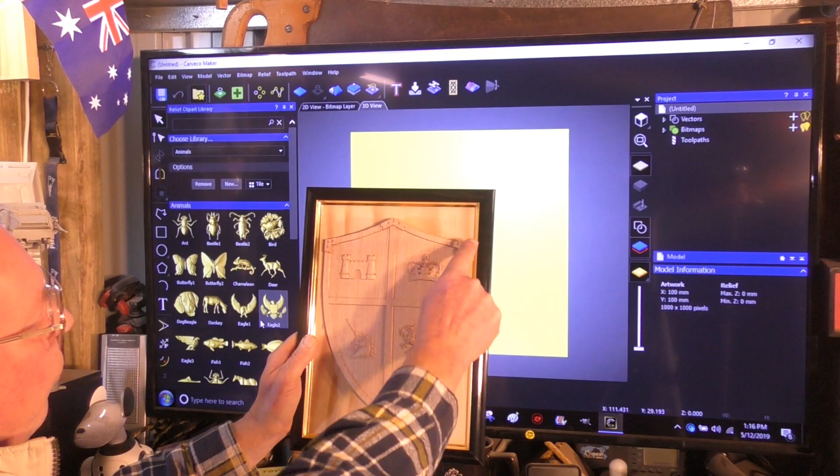What I aim to do today is give you a general overview of Carveco Maker, but we're also going to use some of the drawing tools and some of the toolpath strategies just to get you started. So here's the clip art library, of which there's over 600, and you're not limited to a single relief in your project. This is made up of 5 different reliefs - this is one relief, and I've added on top another 4. So you can make multiple reliefs with this program.

So we'll just get out of this for a moment. We will come back to this in future tutorials, and I'll show you how to make something like that.

So down on this side here we have vector drawing tools. Now a vector is quite simply a line of any description, shape or size. It's a line, so don't get worried when you see the word vectors.

So what we're going to do is just click on the circle drawing tool, and we're going to come here. Incidentally, we're drawing in the 3D view. If you don't want to draw in 3D, you won't see it as 3D because we're doing a 2D drawing. But you can actually switch between the 3D and 2D by these tabs up here at any time.

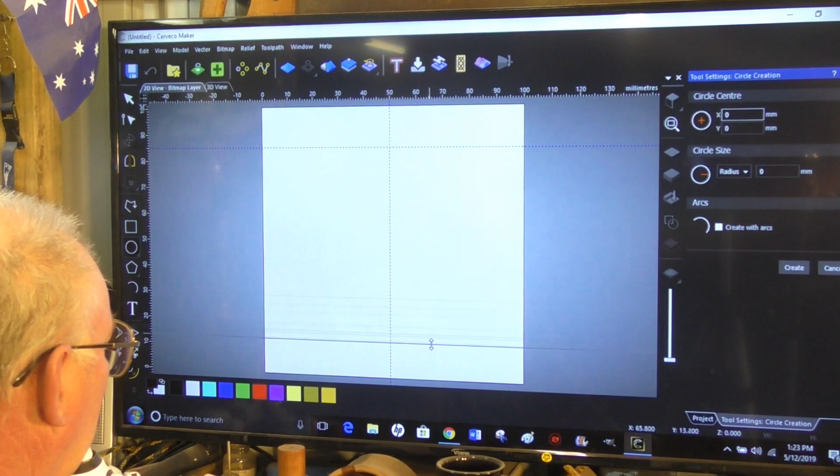And if you wanted another one, there's no limit to however many lines you wish. 10, 15 there. So you can pull out reference lines to assist you with drawing. If you want accurate drillings or pockets, this is where you do it.

So what we're going to do is, we've got our circle selected, and we'll come up here, and snap is turned on. If you notice the cursor, as you bring it, it'll snap to lines, it'll snap to the center. I've got automatic snap turned on.

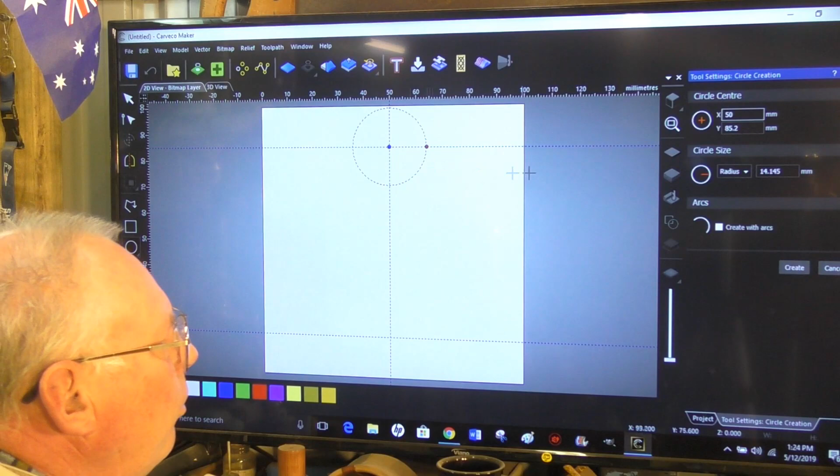So we're going to put one here and just pull it out like that. I'm actually holding down the left mouse, so I can pull this out to wherever I want it, really, and then release it. And then you can go over here into this dialog box or wizard.

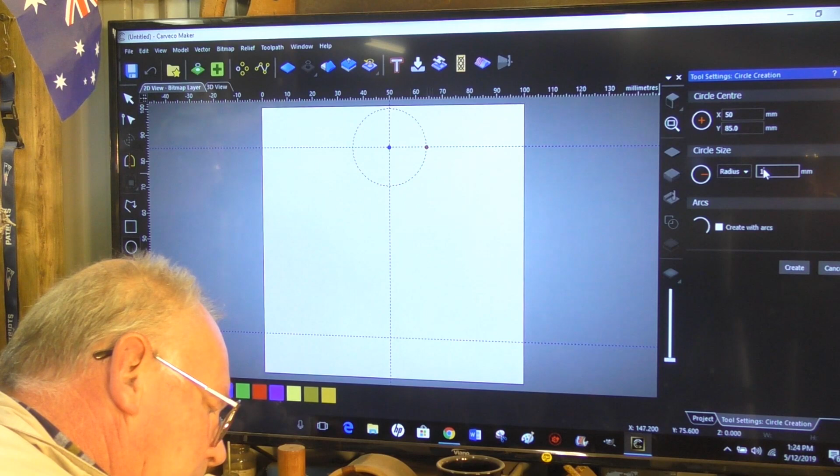And you can select the exact dimensions of what you want and even where you want it. You can see here we're a little tiny bit out. That should be 0, so we're going to put a 0 there. It wasn't quite in the exact position that we wanted. And this needs to be 15 millimeters.

Incidentally, you can work with radius or diameter. So if you prefer to work with diameter, just press on the diameter and it'll automatically change. So we want 30 millimeters diameter. And that's all we need to do.

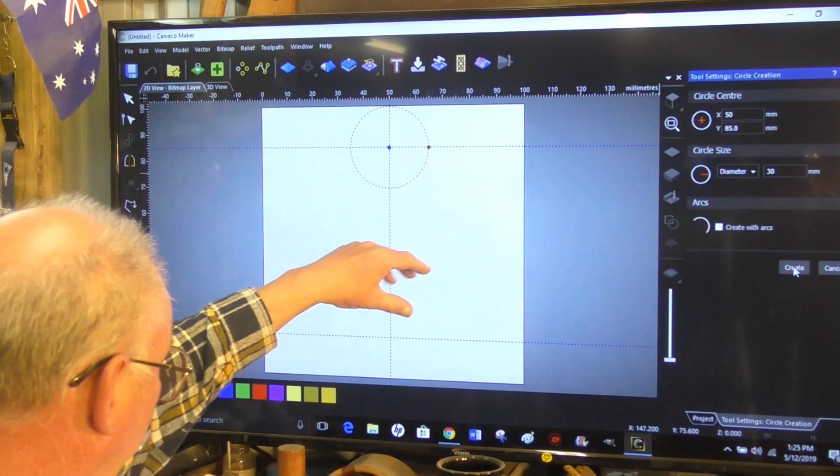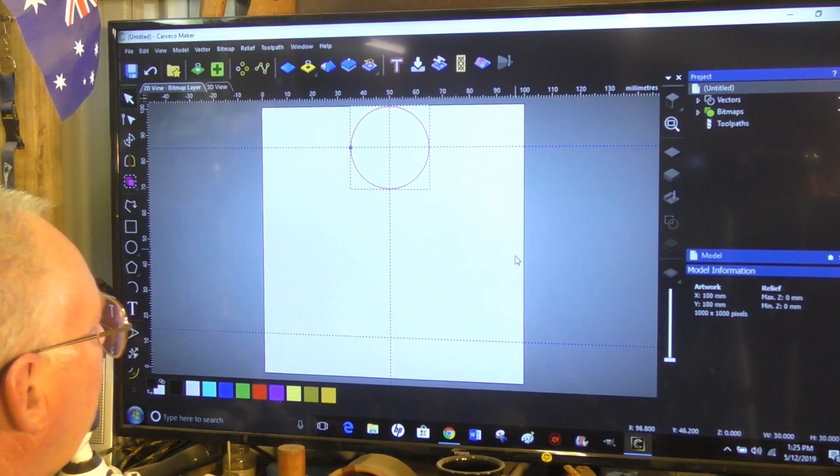So if you are happy with the size of that pocket and the dimensions of it, you can press create. And then you can come out of that, although it's still selected. So you can deselect it just by clicking anywhere on the screen.

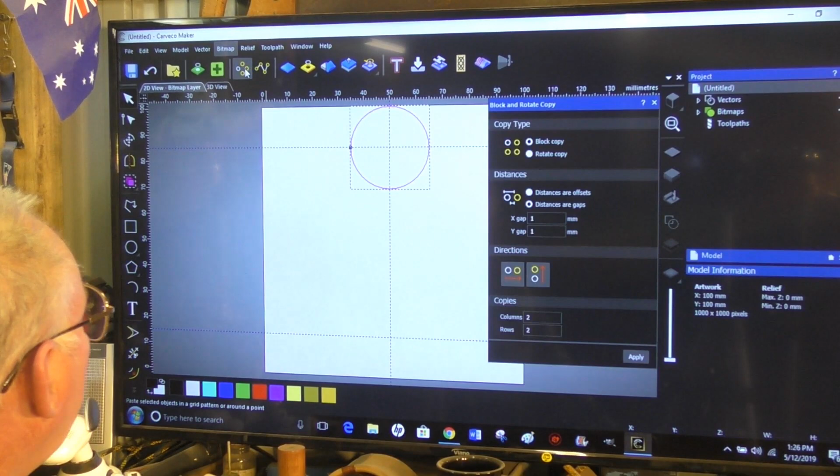So we want to make a copy of that down this far side. So easily, you just copy and move the cursor up to here. You have two options: block, copy, rotate, or paste along a curve or a line. I'm going to choose block, copy, rotate. And there's another little dialog box that comes up here that you can select how many you want to make.

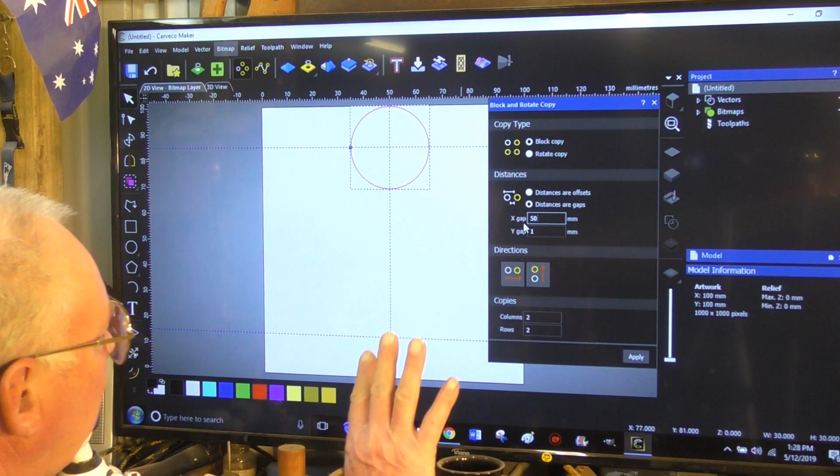We actually only want to make one, but it doesn't matter, we can make 4 and delete the other 2. We can select how far apart we want them. I'm going to say 50 in the X, and 70 in the Y, because I know this intersection is 70 millimeters away. I want 2 rows, 2 columns, apply.

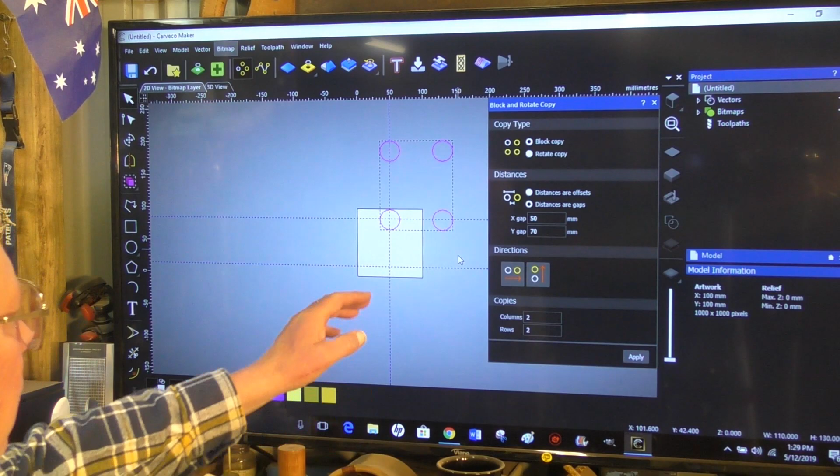You can see it's done it the wrong direction, so I'm going to undo that. If you notice, there are arrows, a red arrow showing which direction you want them copied. If you left click on that, we want it to copy down this direction, then apply.

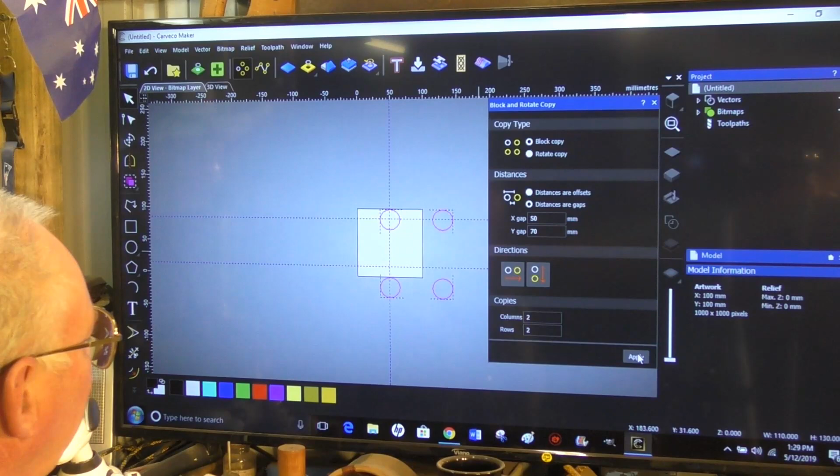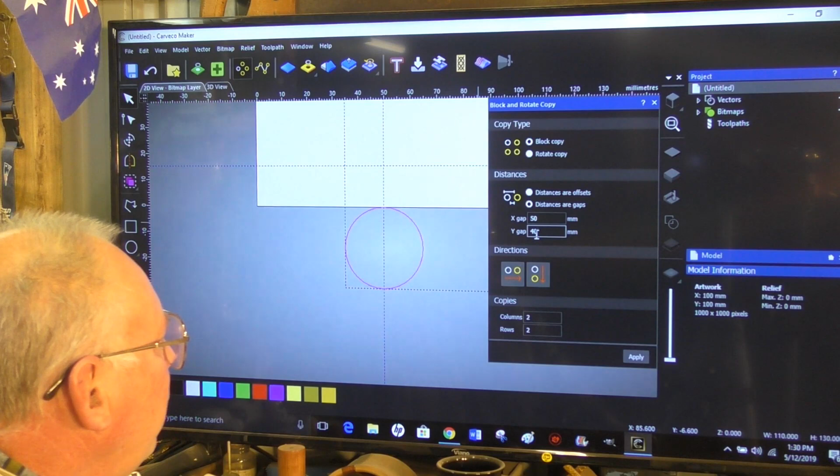You can see I've gone too far. So how far have I gone too far? Center of that one, I've gone 30 millimeters too far, so I need to change that to 40, and I need to reverse that. Apply, get rid of that.

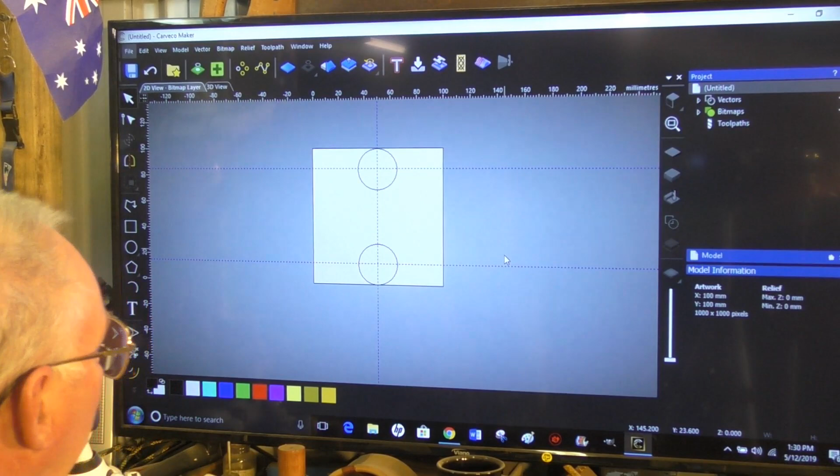Incidentally, I'm zooming in and out here just with the scroll wheel on my mouse. You can see I've got that one in the right spot. Deselect, I just want to select that one, press Shift and select that one, and press Delete on your keyboard, and it goes away. But I have one copied exactly where I want it there.

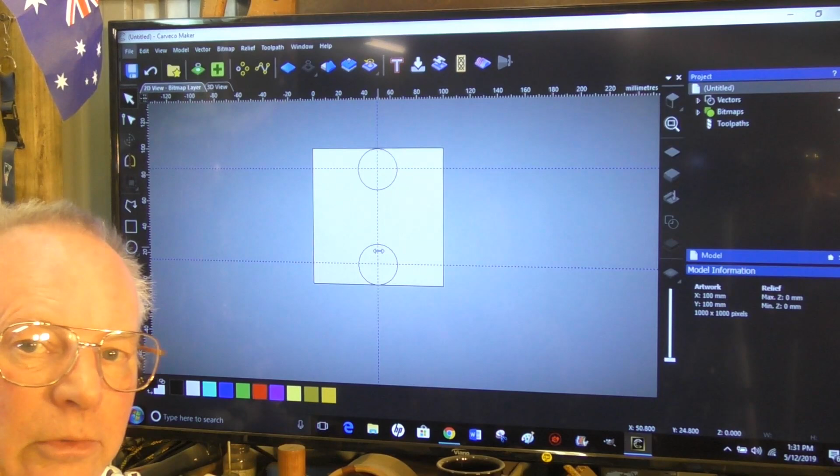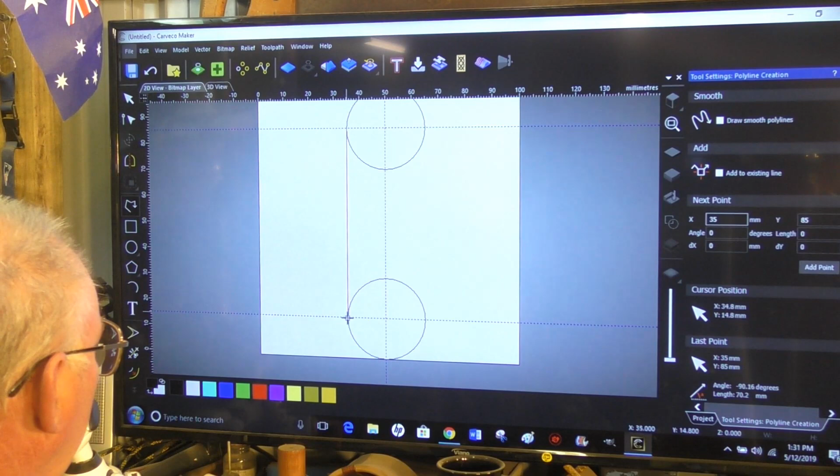So now we're going to draw a line from one side to the other, because I want to make this into a long elongated pocket. We come to the polyline tool, select that, and it will snap to there and snap to here. To stop the polyline from continuing, you just right click. And again.

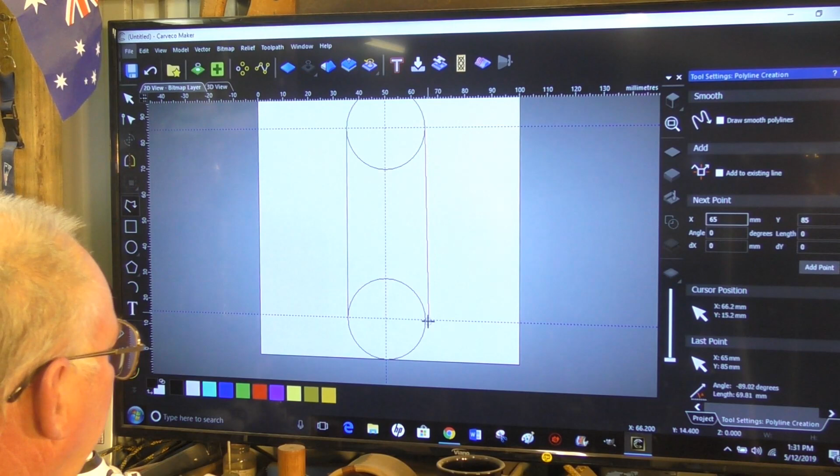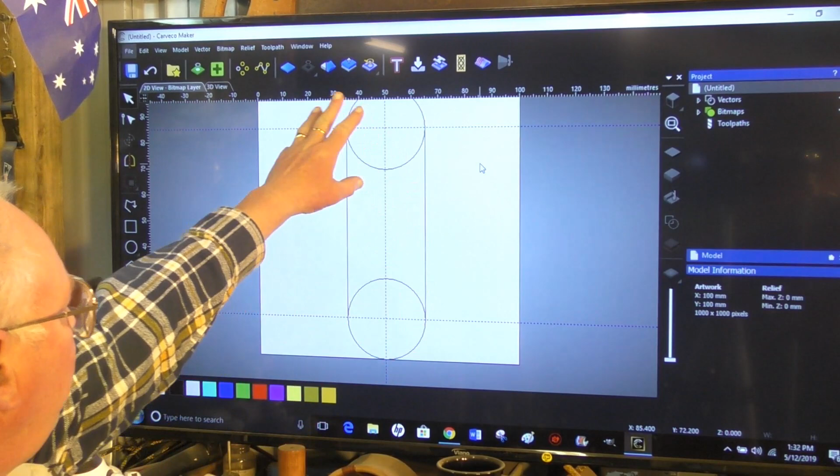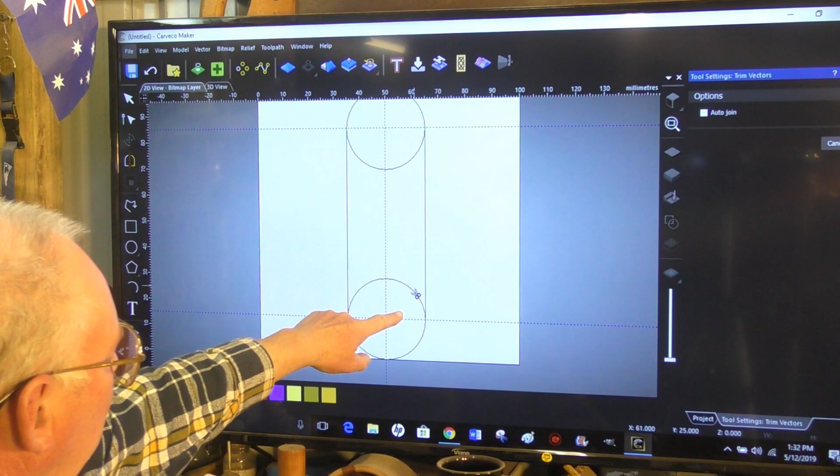And there's our polylines. So now we need to remove these 2 inner parts of the circle. We go to our vector clipping tool, because all these black lines are vectors, it's just a pair of scissors down here. We select that, and if you notice, they open when they go over a line, close, open. When they're open, Carveco recognizes this vector line it needs to do something with. So you hover over it when they're open like that, and left click, and it goes away. Same with this one, left click, goes away.

And now we have our shape. So we come up here to the selection tool, select it. See, they're not welded, it doesn't recognize it as one single vector. So we're going to join all those vectors up. If you go over it, just draw a box over it, I'm doing that by holding my left mouse key down. Okay, so now it's all selected.

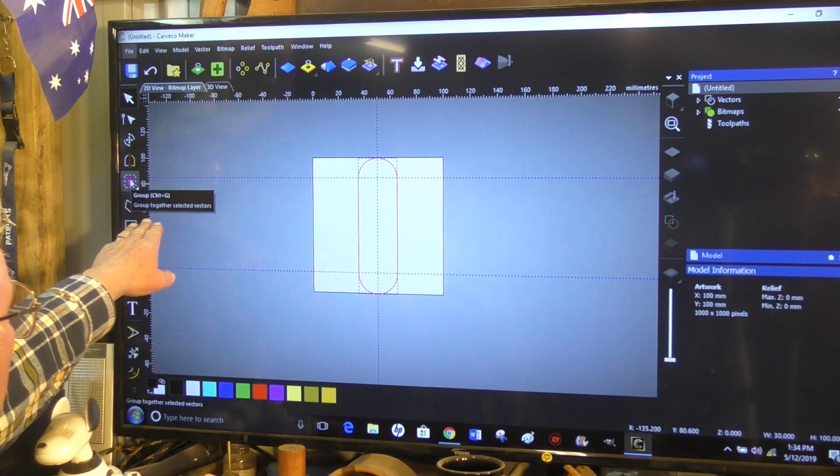So we come up here to this double square little icon. If you hover over the icons, it tells you exactly what it is. We're going to group these vectors together and make them one vector instead of 4. We just press on that, and now if you go to any one of the 4 individual vectors, you'll see it selects the whole thing.

You may hear me slip up and say ArtCAM. That's because I've been working with ArtCAM for about 13 or 14 years, and sometimes when I'm talking about these programs my mind is still in the ArtCAM mind frame. So, Carveco.

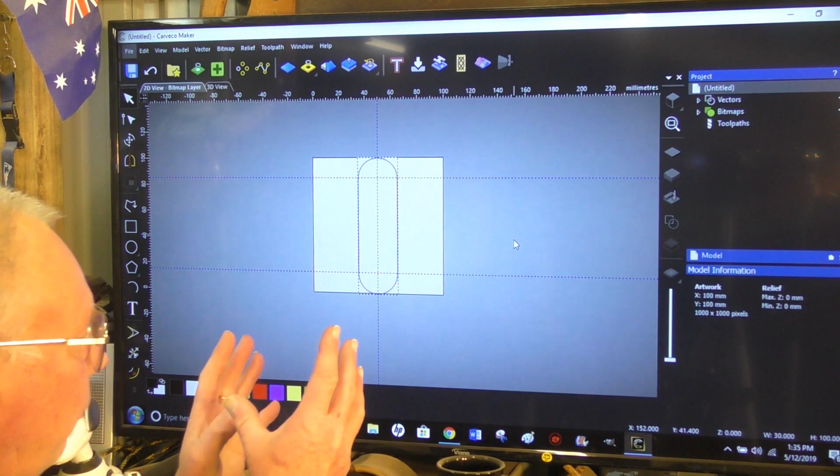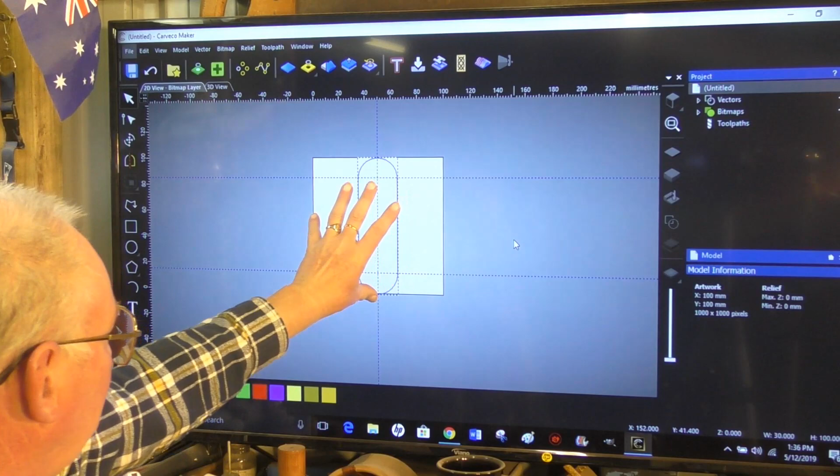Okay, so we now have our part positioned in the material exactly where we want it. We could position this anywhere in the material, this is just a tutorial piece, not going to be used for anything in particular, but that doesn't really matter. So we know our 0,0, or our datum for the start of our work, is on this bottom corner here, and this is positioned in the middle of the work where we want it. So the only other thing we need to do is machine it, and when we set up the tool to machine this, that's what gives us the depth in it, because at the moment it's as flat as a pancake.

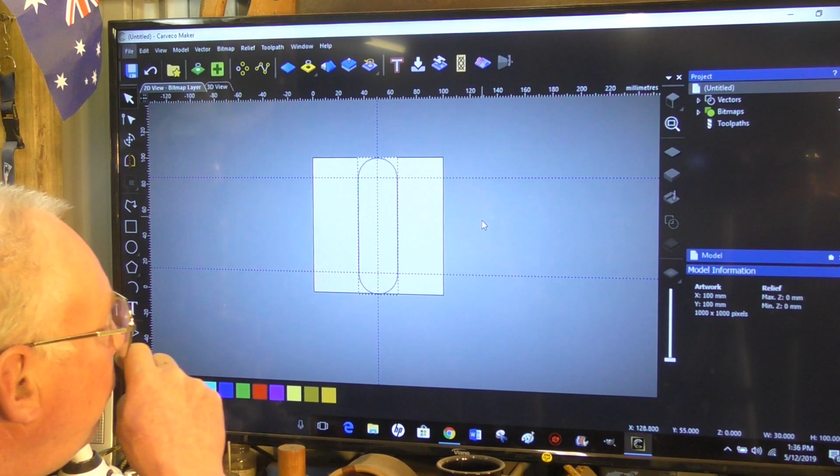So now we're going to choose a tool and machine this with Carveco. To do that, we choose a toolpath. So if you go over here and press on the toolpaths, they come up down here, they're also up here.

We need to... you can go over these, and if you hover over a little icon, the label will come up and tell you exactly what it is. Also, you can go into the help window up here, and in there you can find out what all these tools will do.

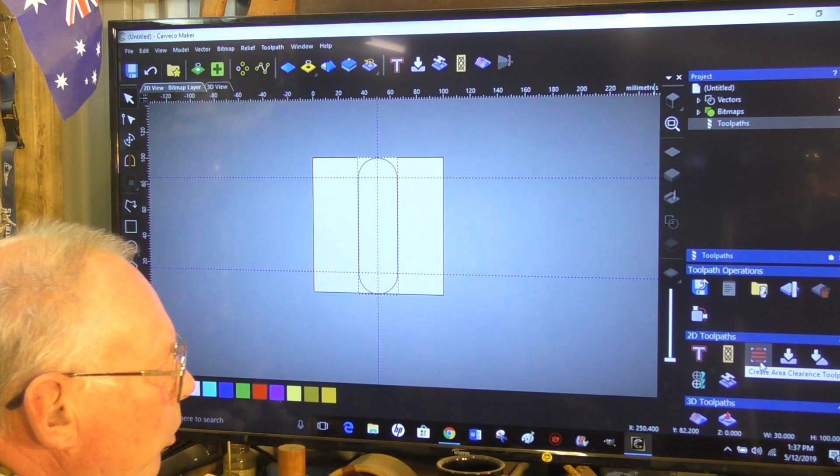We want an area clearance, which is that one there, so we'll pick that one. And this is the wizard, or the dialog box, for the area clearance.

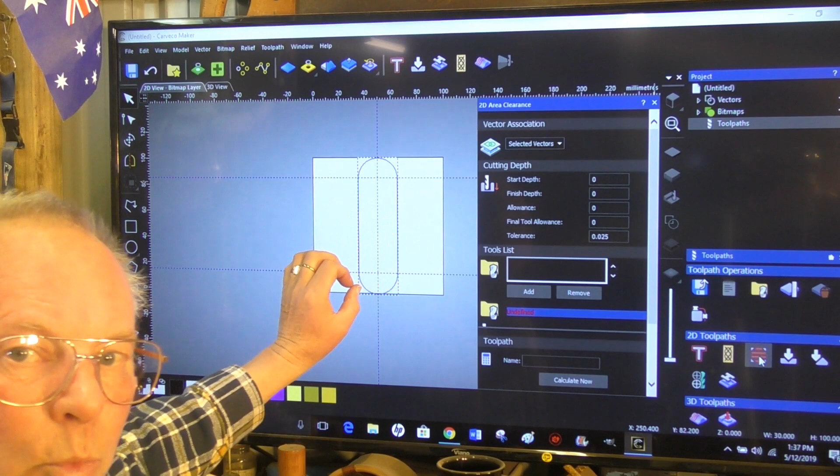So we have our vector selected, it's highlighted and selected. You must always have the vector that you want to work on selected, otherwise Carveco won't understand what you want it to machine. It is the selected vector that we want to machine. You can click on that, and it gives you other alternatives, but no, we want to machine that piece.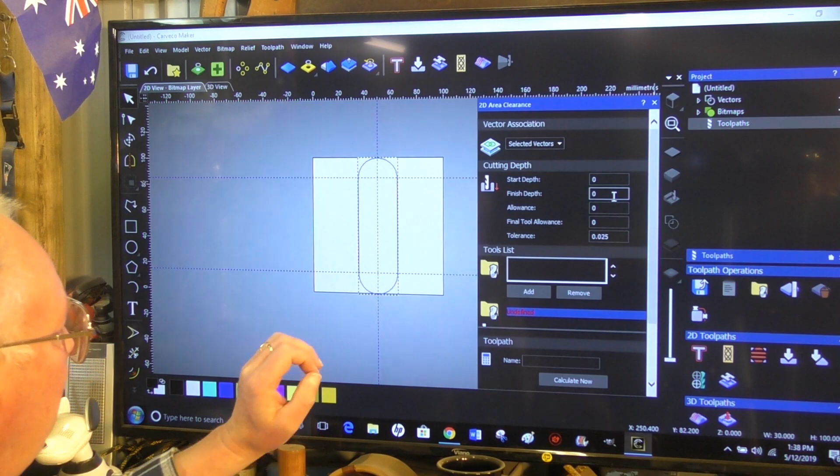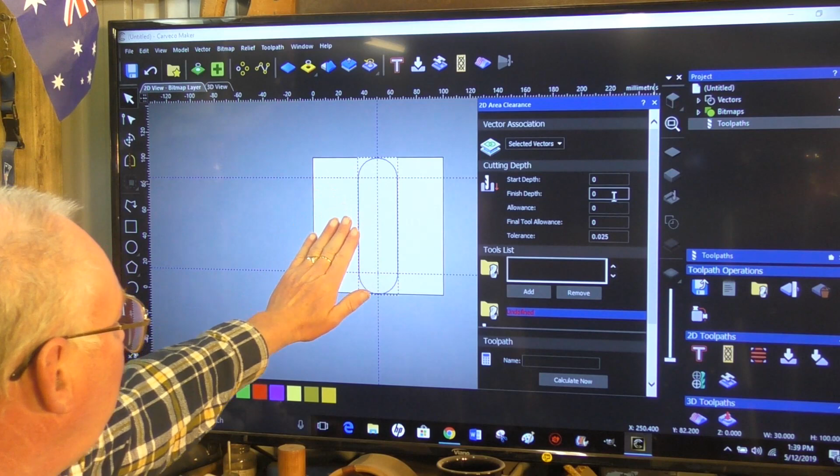Start depth 0. Now I always make the 0 part, the 0 of the material, the actual top surface of the material. I find it much easier that way. A lot of professionals I know use the actual bed, the top of the bed, as their 0. I do know that you can have some problems by ending up machining down into your bed if you're not careful. So I always prefer to use the top of the material.

So we're going to say the start depth is 0. Finish depth, we're going to say 10 millimeters, which is about 3/8 of an inch.

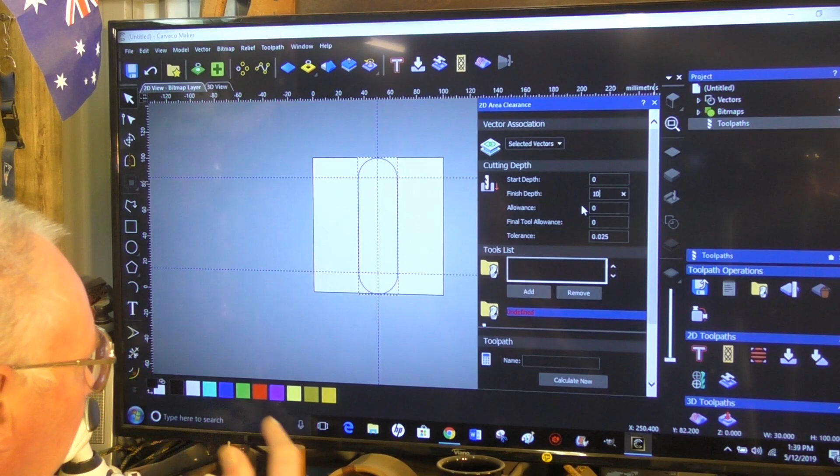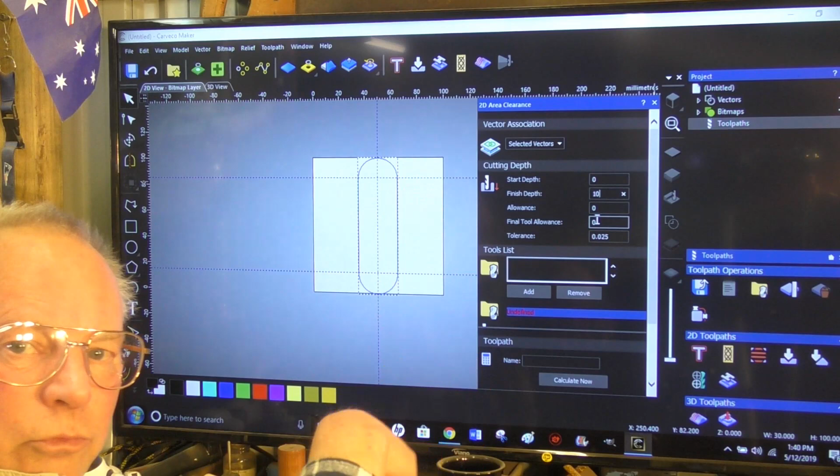For this, we don't really need to worry about tolerances or allowances, because we're just machining a piece of wood. With wood, it doesn't really matter, to the nearest thousandth of an inch is fine. If this was aluminium and it was a precision part, which CARVECO will more than set the tool paths for, then you would machine it out roughly first, then go back in for a finishing pass of a couple of thousandths of an inch to get it really, really accurate.

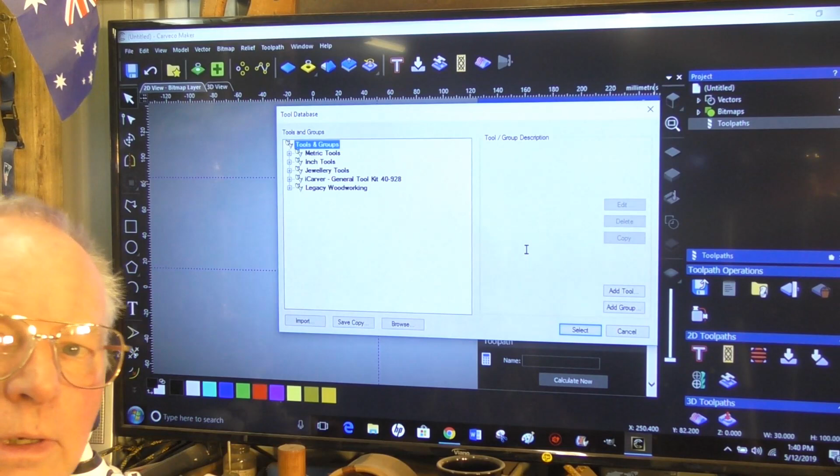Okay, so now we're going to go into the tooling list. We want to go in and press add. This fetches up the tooling list that already is written into CARVECO.

And metric tools, so we press on that. Let me have a look here. Wood or plastic, that's what we want. Roughing and 2D finishing, that's exactly what we want. See, roughing and 2D finishing.

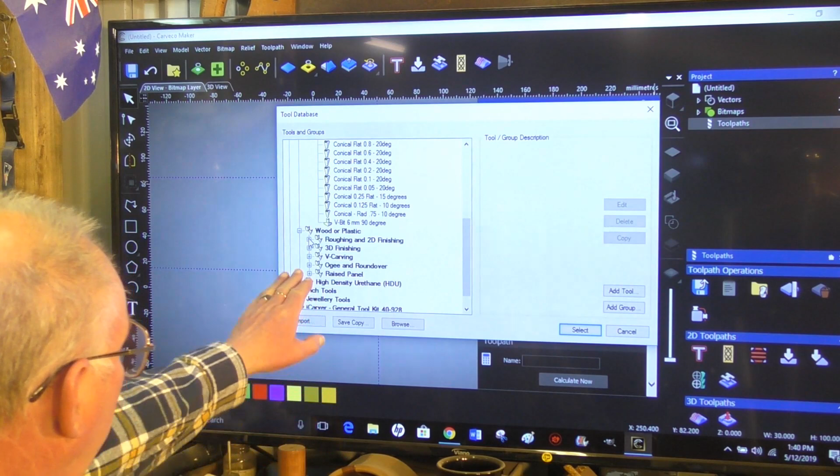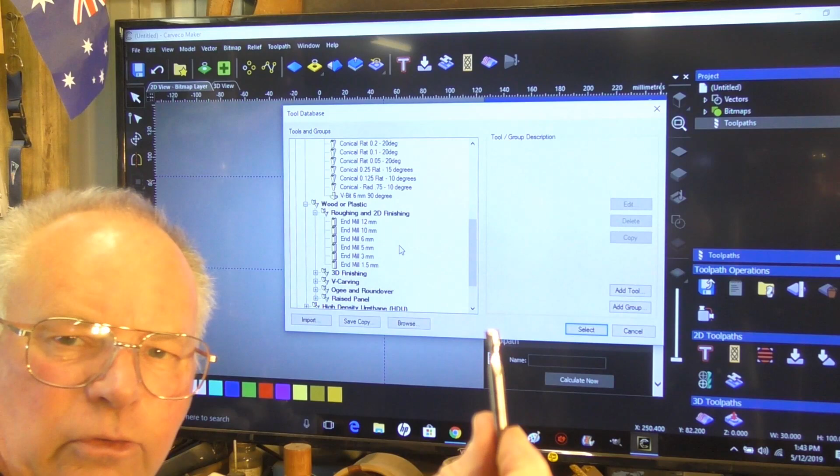And we're going to be using... I better find out what tool we're going to be using first. The tool we're going to be using is one of these, which is a 2-flute 6mm, just slightly smaller than 1/4 of an inch, end mill.

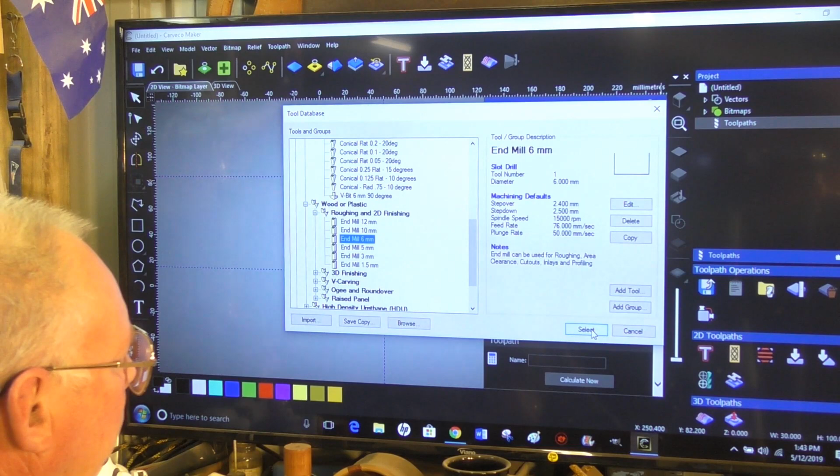So we're going to do the speeds and feeds now for a 6mm end mill, and here's a 6mm end mill here. So we're going to select that one, and now log it in. So there it is. But of course, it could be many different types of material.

So now we have to set the speed and feeds for this particular material, which is pine actually. Step over 2.4 millimeters, fine. Step down 2.5 millimeters, that's fine as well. Feed rate 76 millimeters per second.

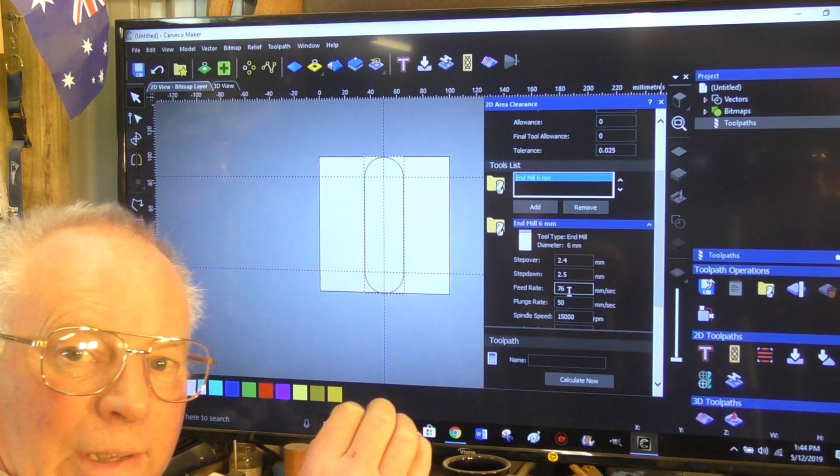Okay, so what's that, 3 inches per second. But I'll show you that you don't have to actually run it at that speed. In Mach3 you can elect to start up at a percentage lower than that, anything from 1% to 100%. I'll show you that next.

Plunge rate 50 millimeters, that's probably a little fast, so I'm going to alter that to roughly about 50% of the feed rate. That's what I normally do. So we're going to say 35, which is fine.

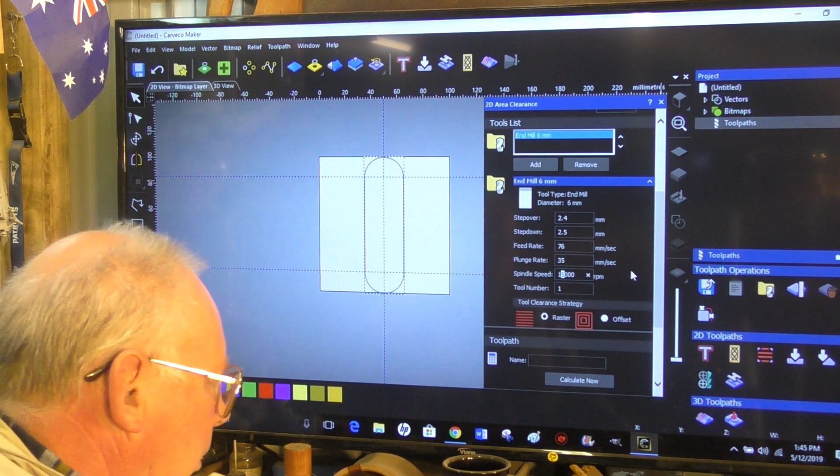15,000 RPM. Probably needs to be a little faster than that. So I'm going to run this at 18,000 RPM. There again, you can alter this on the controlling program.

Tool number 1. Look, I don't have a tool changer. If you had a tool changer on a Tormach or something like that, or a Mazak, then you would put the tool number in here. But it really doesn't matter for me.

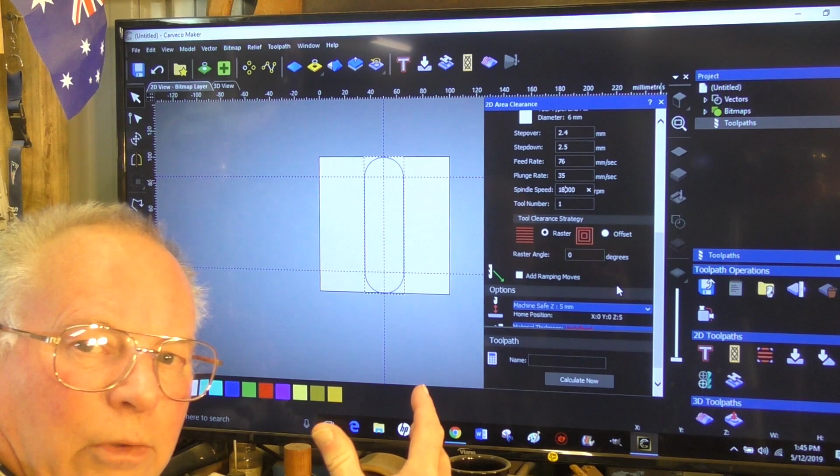Now, then it comes down to the strategy, how you want to machine this. You can either machine it in a raster, going back and forth like this — not really for this type of job. You do an offset, and I normally choose climb milling, and I normally start on the inside.

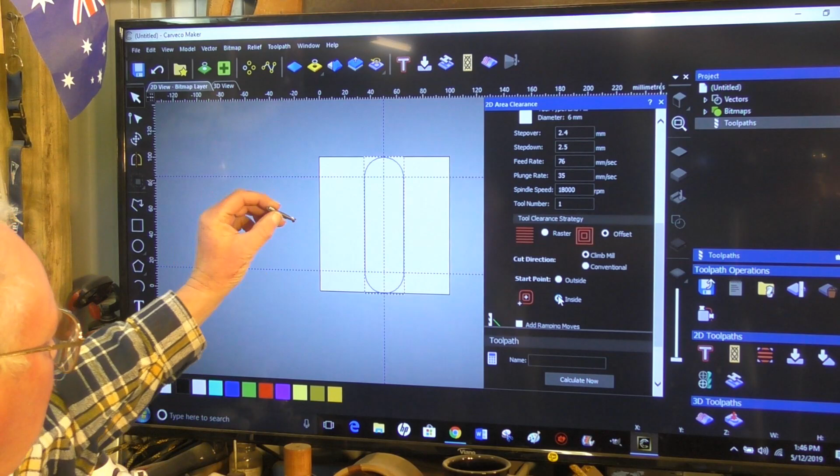So in other words, it's going to come to the inside of the material, and start machining from the inside out. That's exactly what we would want. Otherwise you can get some tearing, and well, you'll find out through experience, I think, but that would be my recommendation.

Now then, add ramp moves. With this sort of timber, you know, with pine or MDF or material like that, you'd probably be all right for the router head to come over and go straight into it and start machining straight away.

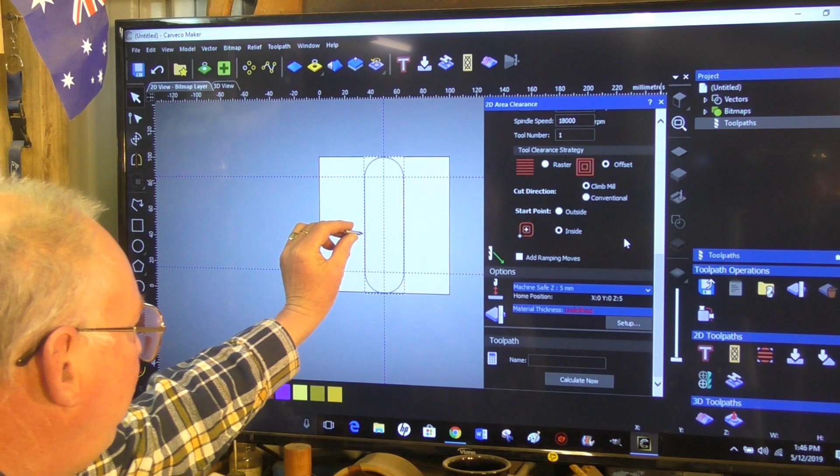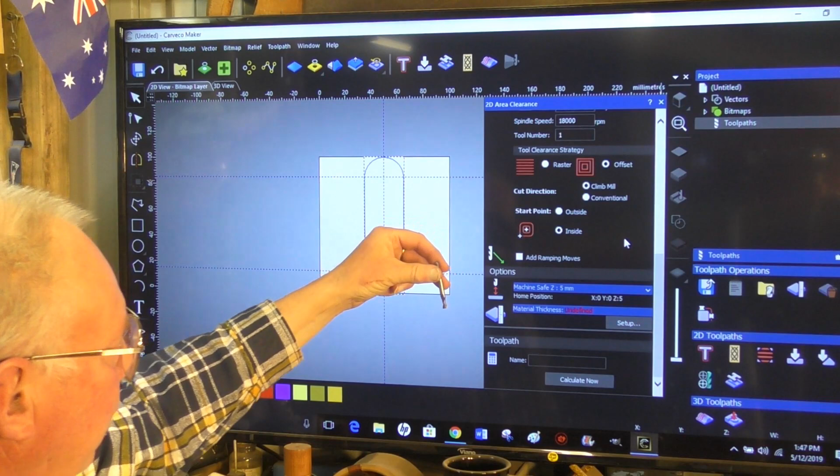But I find it a very good practice to have a ramp in or lead in move. In other words, the router head is going to come along to the start position of the job, and then start to ramp in and come in gently. It gives you a chance to hit the panic button or stop the program if you see something going wrong. You don't destroy the whole job.

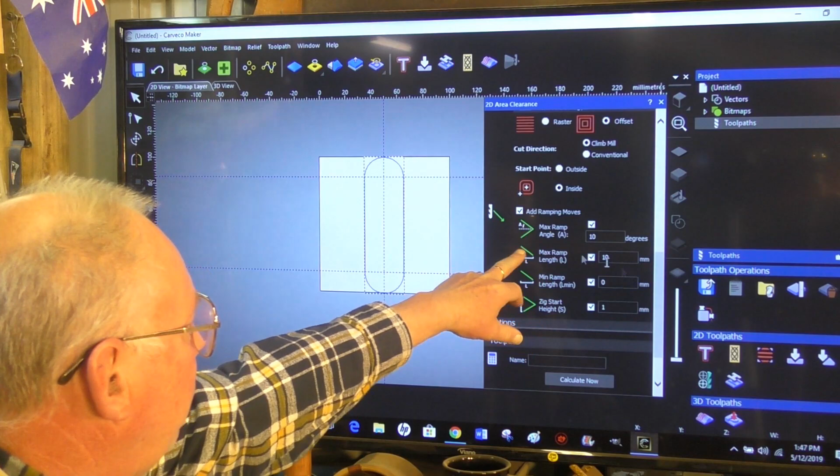So we're going to say yes, we want ramp in moves. This is an expanded dialog box, or wizard, that asks you, okay, is 10 degrees okay? In other words, a 10-degree angle coming in, it's fine. Ramp length, 10 millimeters, yeah, that's fine. These two really don't matter. The general information, the angle and the ramp length, that's all you really need to put in there.

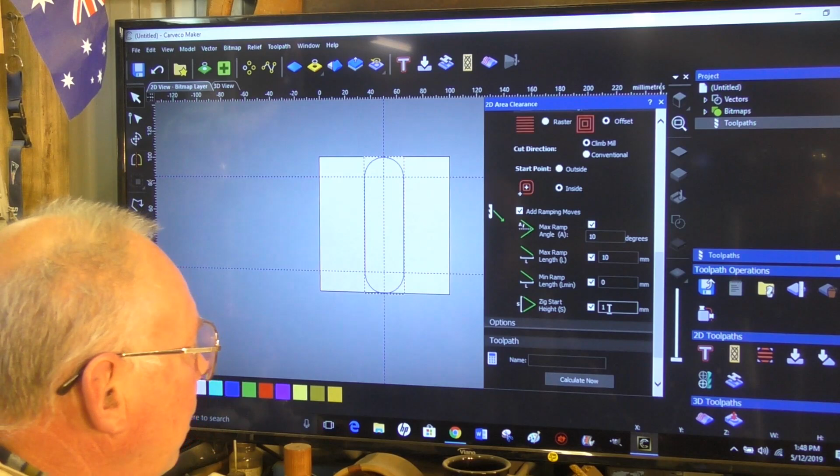Okay, machine safe over the material. Now, CARVECO has elected 5 millimeters, and generally that's okay, but you can set that to whatever you want really.

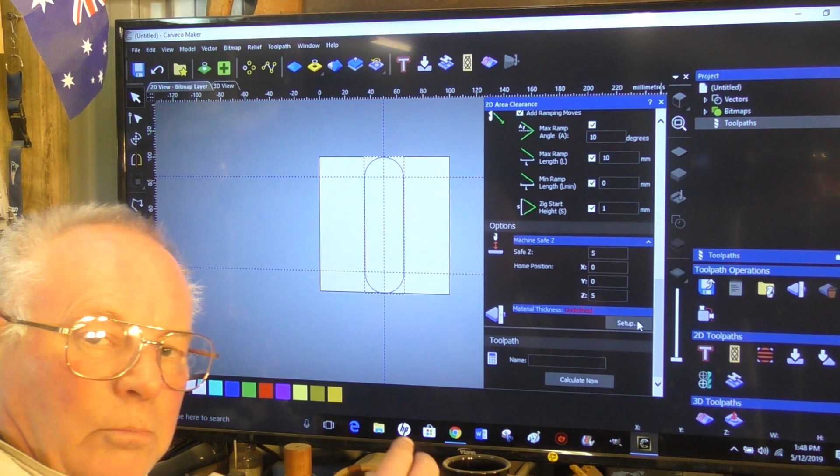Now then, we're going to set up the actual material thickness. Here we are, and CARVECO provides you a diagram giving a little bit of explanation of what this is about. So I can tell you that it's 19 millimeters, the material that I have on, set on the top. So it's 19 millimeters thickness of material, okay.

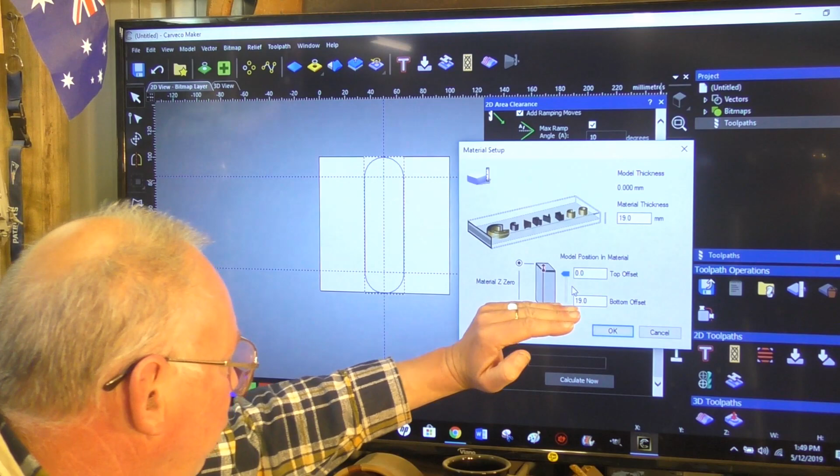And this slider here just gives you the option of where you want the 0 position. Remember, I was telling you that, especially if you're starting off, you need to have the 0 position on the top of the material. This is where you would alter that. And I always work on the top of the material, yeah? Material Z, top of the material. You won't get any problems then.

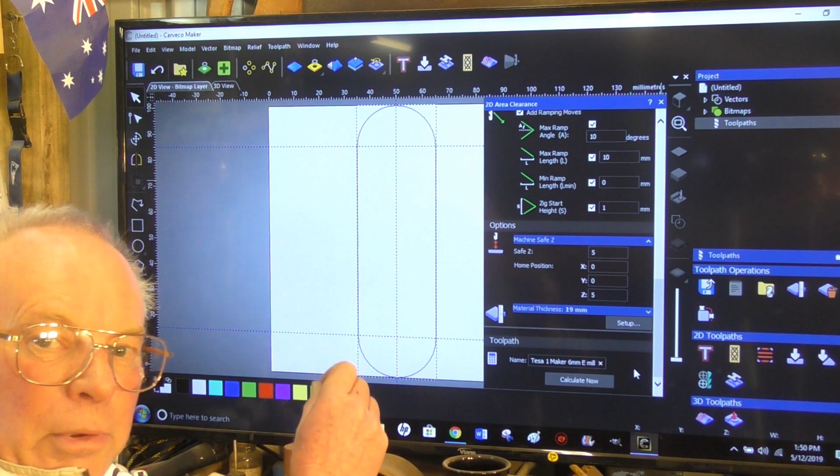Press OK. And we're going to name this Tesa 1 Maker, and I always give information about the tool that I'm going to be using. So it's a 6 millimeter capital E end mill, just abbreviated, simple, so long as you can understand what it is, okay, in relation to what part of the program that you write in. That's good, that's fine. So now you just press calculate.

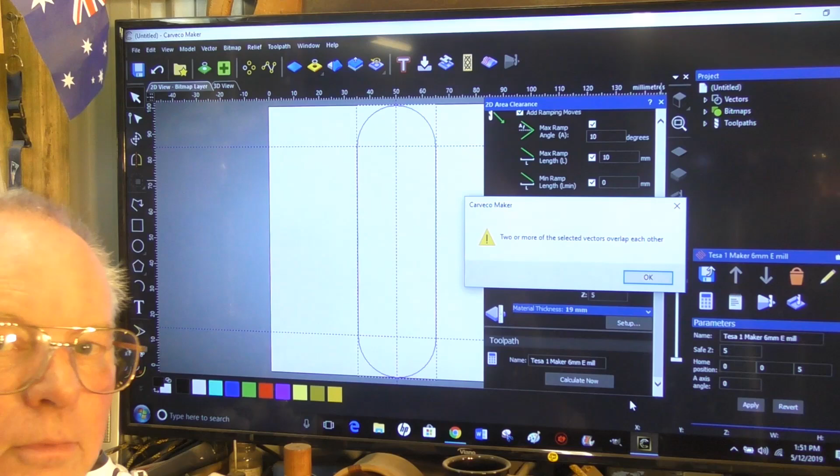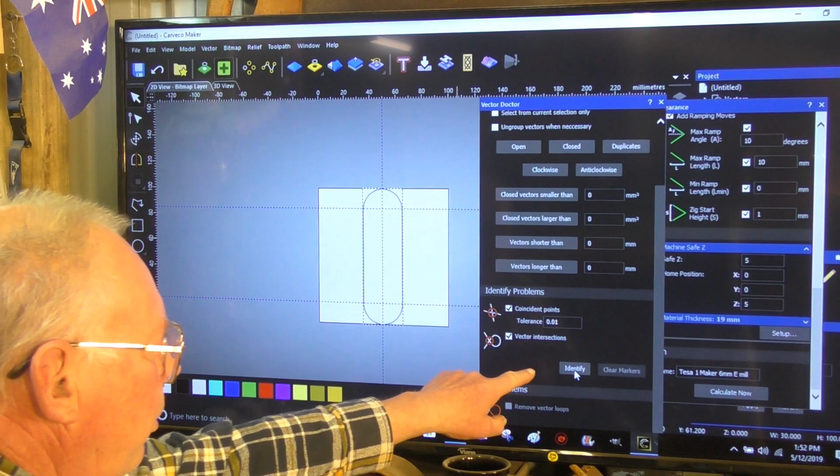Okay, so now it's coming up and telling us that there's a problem with the vectors. So now we're going to use another tool to automatically find out where the problem is, and that is the vector doctor up here. So we're going to press that. Okay, we're not going to worry about that. So we're going to ask it to identify what the problem is.

So it's identified these 4 joins here. Okay, so we know there's a problem on each of these 4 corners.

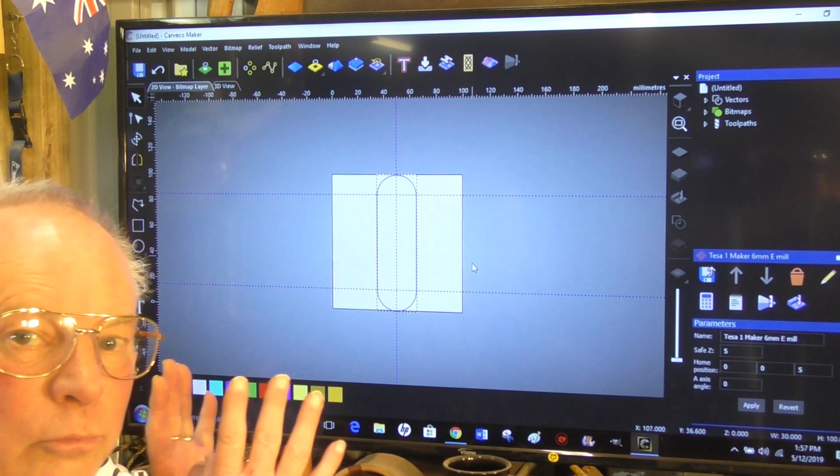Now it's very simple to solve that problem. First of all, you need to come over here and ungroup the vectors so it'll go purple. Then we need to virtually weld these vectors together to form one piece. Now, as Carveco Maker comes, the tools for doing that are hidden actually, and I'll show you a very easy way to get to them.

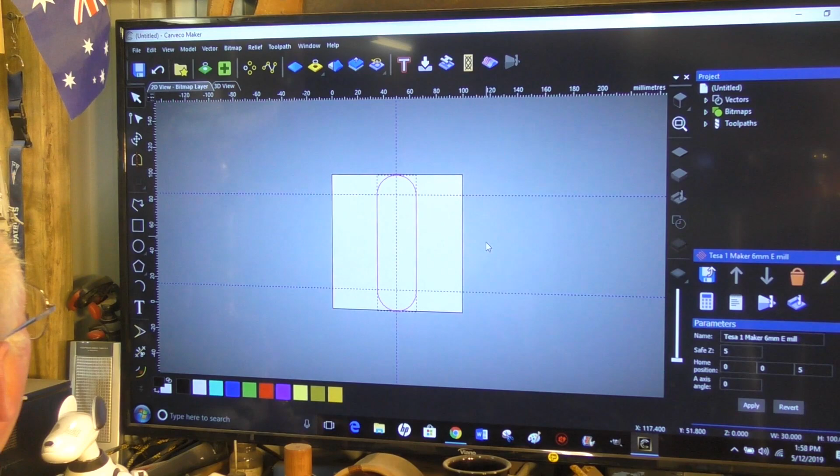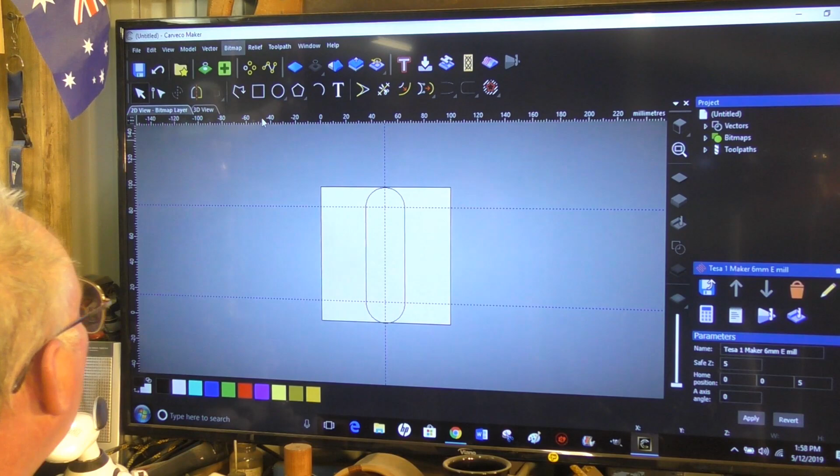And you can alter the screen around whichever way it suits you. They're actually down here off screen. Okay, you see where I'm pointing down here? Now, simply to get to them, there's 2 ways actually. You can either get to them here, or an easy way of doing it is you just grab this toolbar by left clicking and move it up here, like so, and they're revealed here.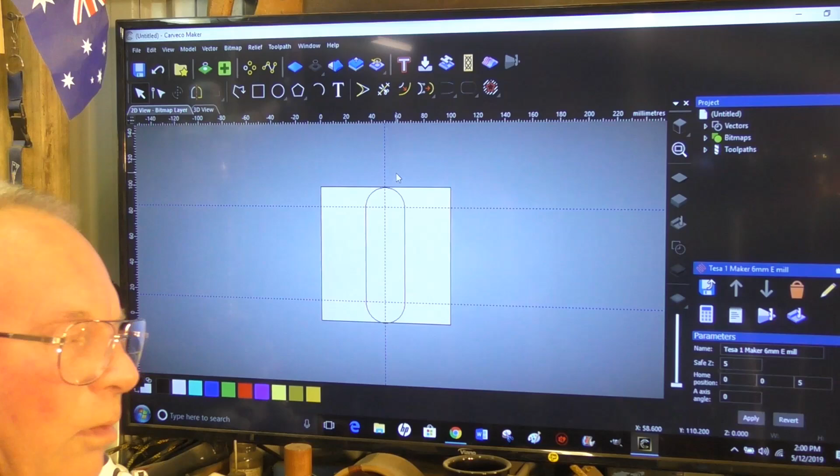So what we want to do now, you notice as soon as I click on one, okay, shift and click on another, these light up, enabling you to use them. So the easy way of doing it is select the 2 vectors that you want to join together, come up here and say you want to join these 2 vectors with a line.

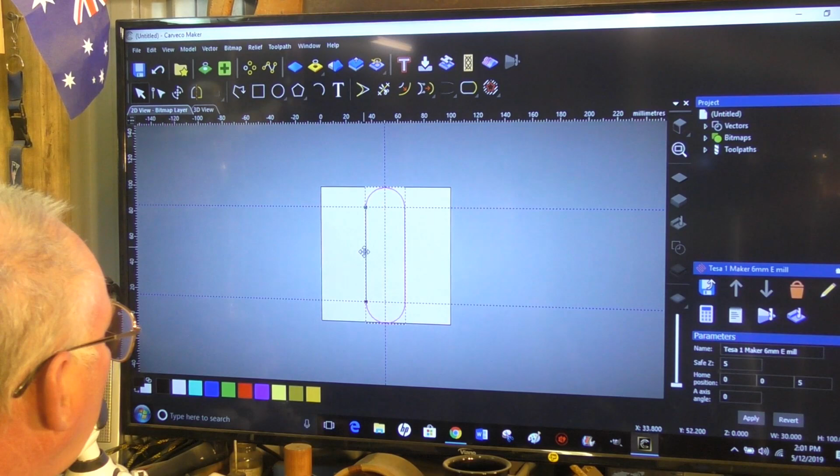Okay, select another one. You want to join that one with a line. Select that one and join that one. So now you know that they're all joined up, and it's indicated by a little green square here. So now it's all one piece.

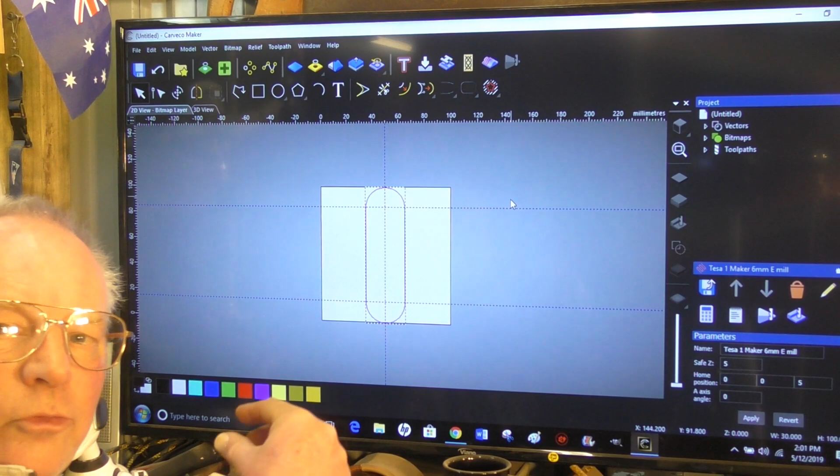So Carveco won't allow you to go into a machining strategy - it will always pick up that there's a problem here, and you need to go back and solve it. So just showing you quite easily that the tools are in Carveco to solve these problems. So we'll just put this back where it was now.

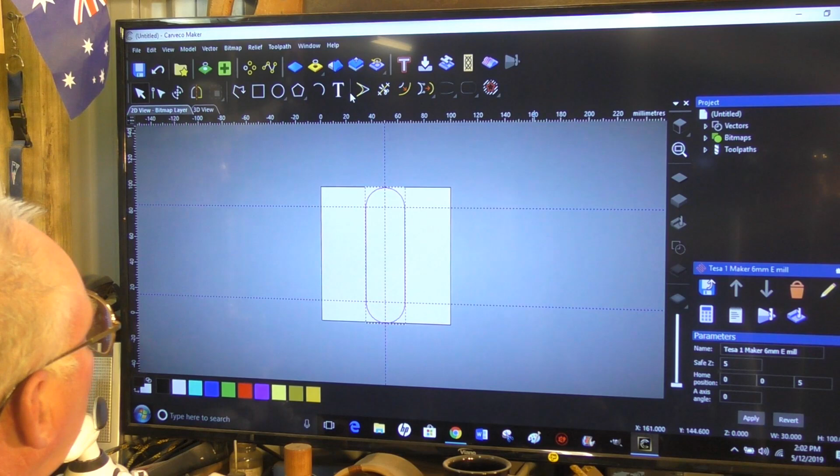So if you see that little grey line there, just hover over it, left click and move it back down. You can move things around the screen to suit yourself. So now we can come back to our machining strategy and calculate - and it's as quick as that.

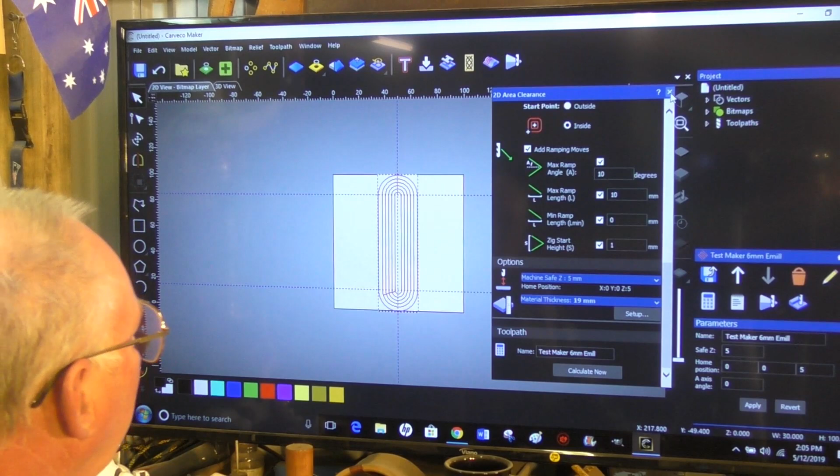So we can come out of that now, and now we can go into the 3D screen, and we can turn the rulers off now. So remember, we come up here to view, view, and deselect that, and the rulers go away.

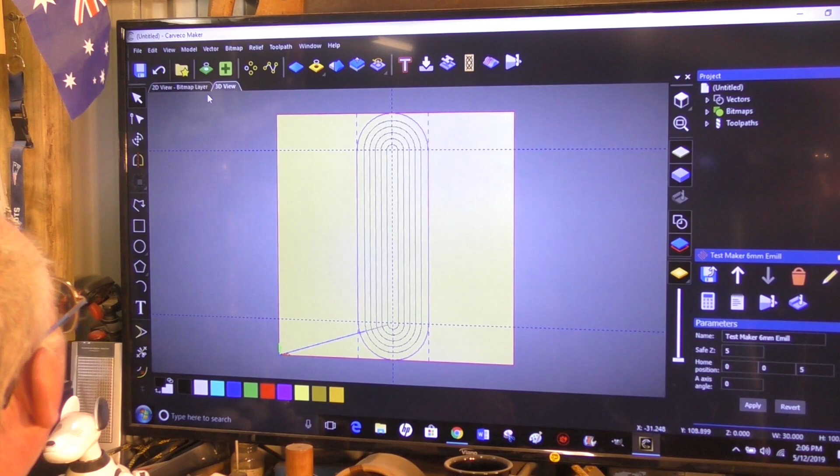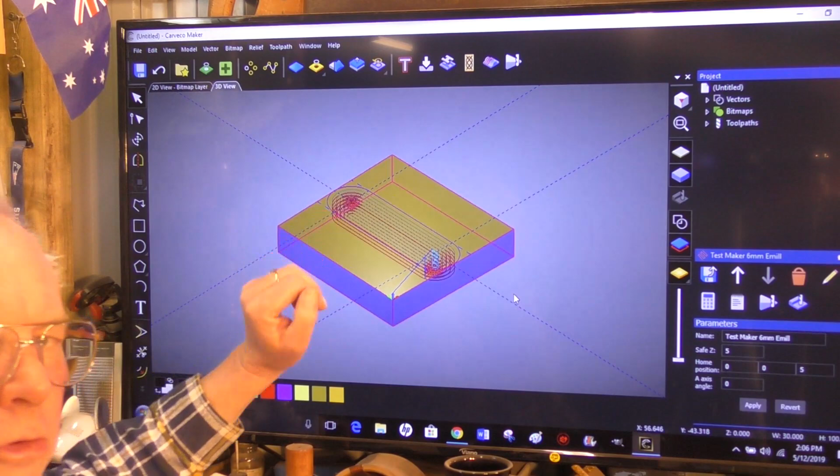Now, if you come up here, there's a view cube here that you can use to go to a precise viewing angle, so you can see the number of passes you're going to have. You can actually see the tool paths there.

We're having a bit of a storm outside, so I hope you can hear me okay. So now what we're going to do is simulate this.

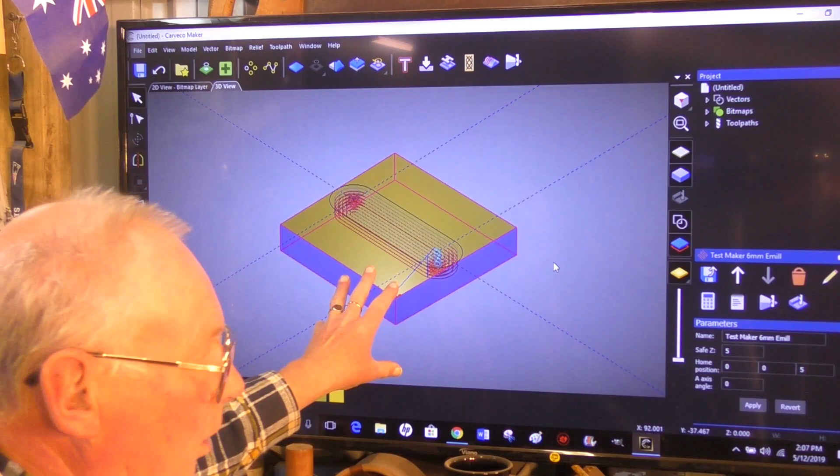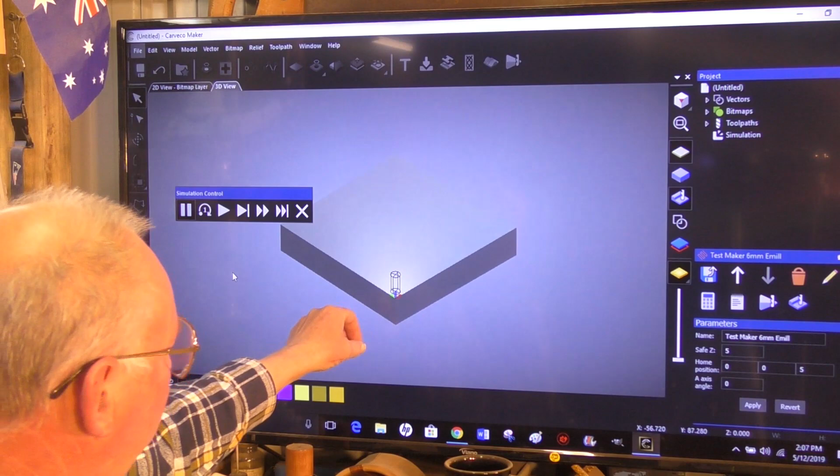So here's the simulation tool over here, so we'll click that. Carveco has shown the tool at the work 0,0 position, which is right here on this front corner, if you remember. So we're going to press play now. And there it goes - what you see here in the simulation is exactly what the machine's going to do. And there's our pocket.

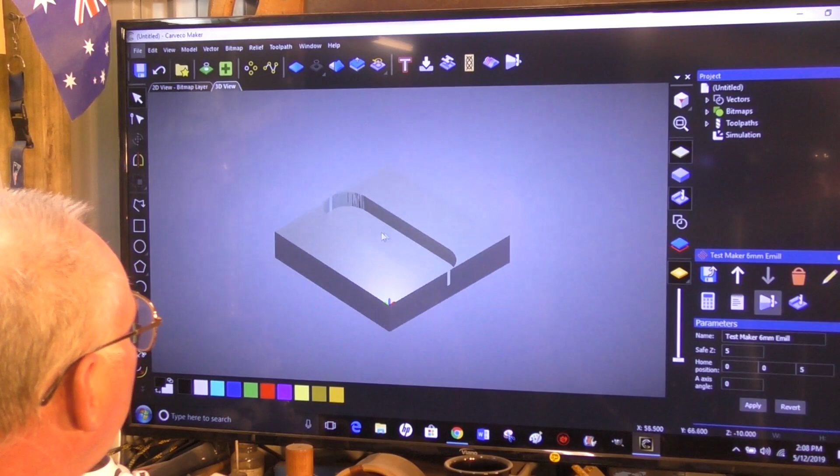If you want to move it around on the screen, you just hover over it and press the left and right mouse buttons together, and you can move it around. So all we need to do now is send that machining strategy to our machine.

Okay, this is my particular machine, which is a 6012 - that's 600 millimeters by 1200 millimeters, or a four foot operational size table. So this is the position of the machine home. If you remember, at the very start of this tutorial, when I was talking about the machine home and the work at 0,0, well this is the machine home. This is where it lives over here, so you can easily change the tool.

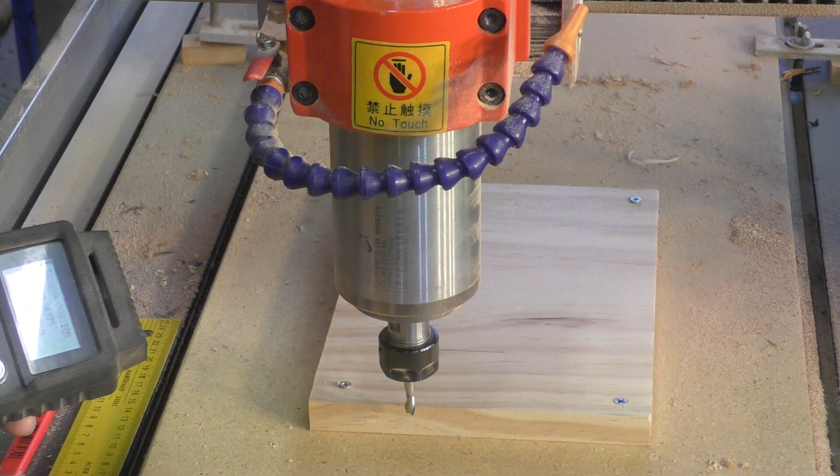So now I'm just going to take the router head, or spindle head, over to the 0,0 point of the work. This, by the way, is called jogging - jogging the machine around. So just take it over very quietly, and I've marked on this piece of waste material the 0,0 or start position of the work here.

That's close enough for this particular job. Now we're going to set the 0 of the Z.

To do that, you just get a piece of paper - this is one method of doing it - and just bring the tool down so it just traps the paper there. That's it. So now in Mach3 I'll set the 0,0.

So there, that's all set, and I will now start the machine going and machine this part. And after the router has completed machining that job, it returns back to the home position, or the 0 point of the workpiece.